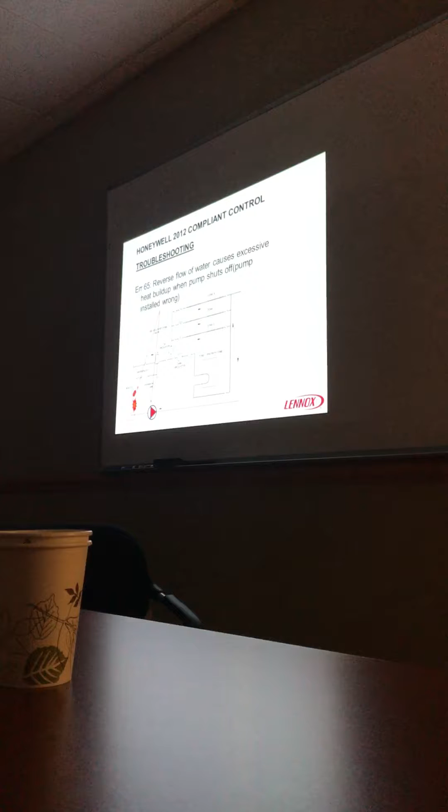Okay, so this is what I'm talking about. I don't like the circulators on the returns. I don't like that. Look at the supply, right? I like it pumping away. Pumping away is always better, if you can pump away. It's pump away. It's better. What do you mean by away?

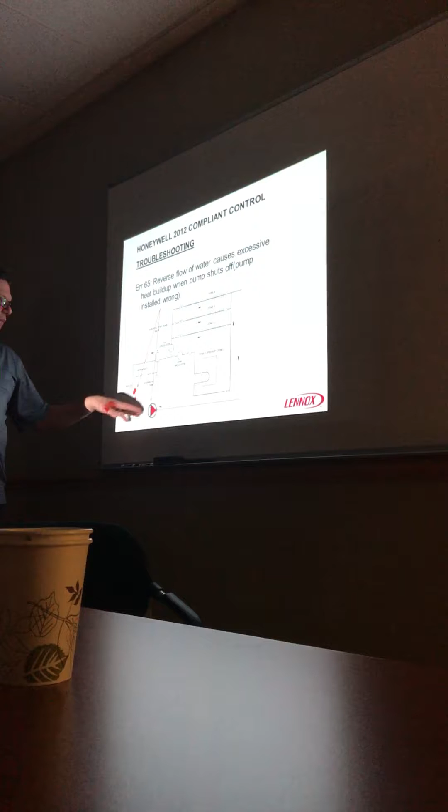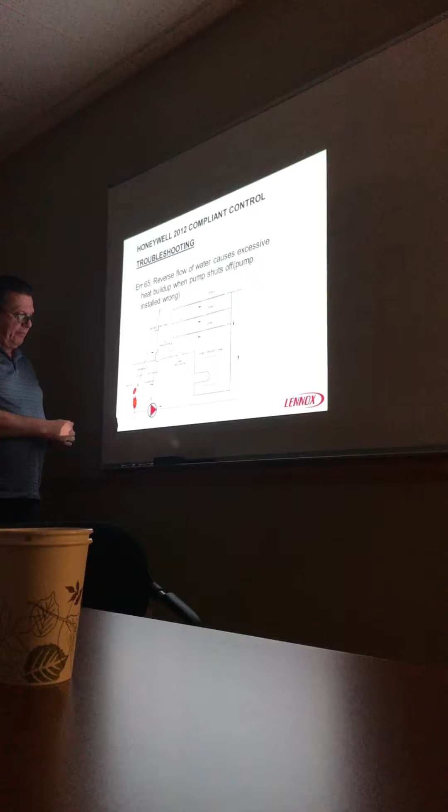Well, because this is on a return side, all return side here. Away would be on the supply. So we mount the circulator here. We're not going to drag that boiler ever into a vacuum by pumping away. Just dragging a return, we're getting all this cavitation, dribbling back and stuff. Circulators aren't going to last as long as they will on the supply with a full column of water on it. Right. So in New York, most of them are on the return.

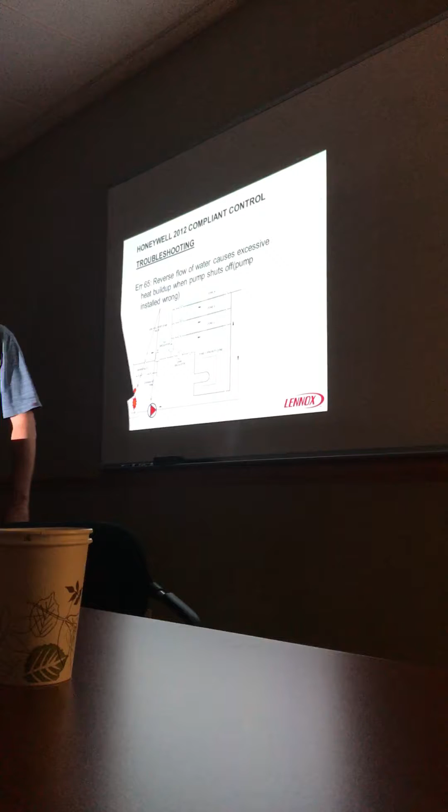Well, that's because 98% of boilers, when they ship the boiler on a pallet, they put the pump on the return side, because there was a flange there, a perfect place to mount it. We stopped doing that. That's why we mount them in a box. So they come installed, but you can move it. Absolutely. A lot of the installers just leave it there because it was already there. They assume that's the right place, the best place, and leave it. But piping this way and dragging the water would be wrong all the way around.

Aside from extending the life of the circulator pump, what's the other benefit of having it on the supply? Feeds water better. It's not going to drive down into a negative and overfeed the boiler, because it's always added pressure. As far as the piping system, anything but a primary secondary loop. On a primary loop job, if we're trying to drive the air out of that loop, pumping away is going to add pressure to the system, where pumping a return is going to be drawing it into a vacuum. Could it also cause more air to go into the system because it's on the return? Yes, it'll drag air in, where pumping away is going to pressurize.

Some customers of ours, every year, once or twice a year, they get air in the system. And they're quieter too. Airbound. Perfect customers for a pump away conversion. Textbook. Look, we could stop this game of me coming and hooking up the hose and dragging buckets of water out of here, trying to drag the air out of this thing, by converting it over to pump to the supply. Absolutely. See, you learned something.

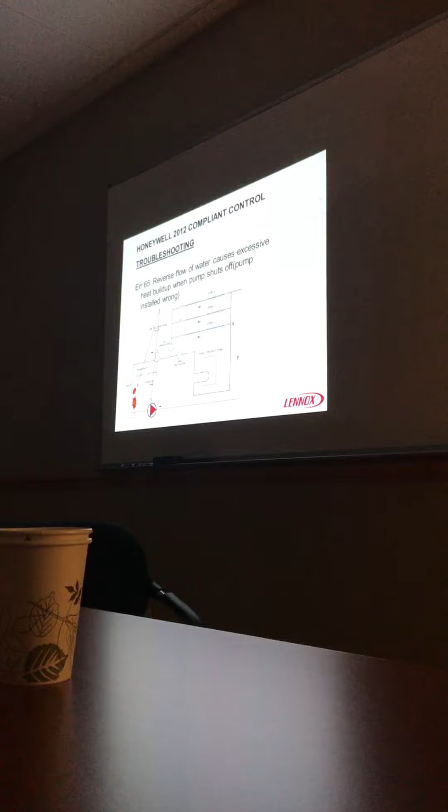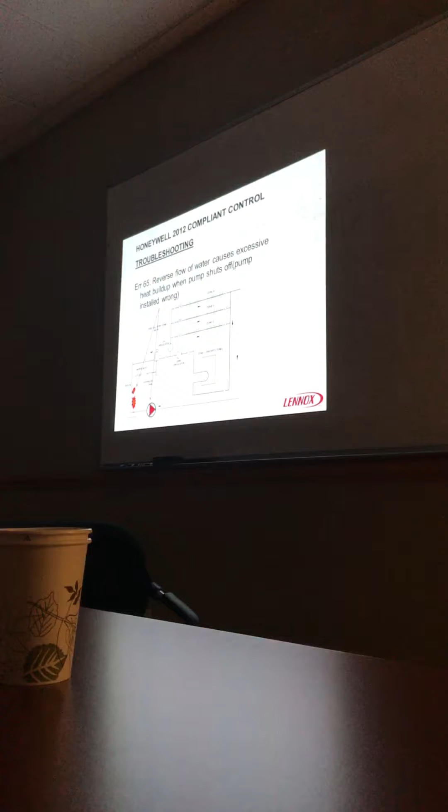One of them called like that the other day. Yeah, that's why. You haven't really enjoyed a good time till you try and drag all the air out of a monoflo tee system. It's a nightmare. And then you get a schmuck that tries to do it with the circulator running too, so you really have a bad time, because you can't get the air out of a monoflo tee with the circulator running. You gotta shut everything off.

But you're right. 98% happen on the return and they leave it on the return, because they were sent out that way on the pallet. So how do we discourage it? Leave it in the box. So now we leave it in the box. That's why it comes in a box on my boilers. Smartened up. Took years.

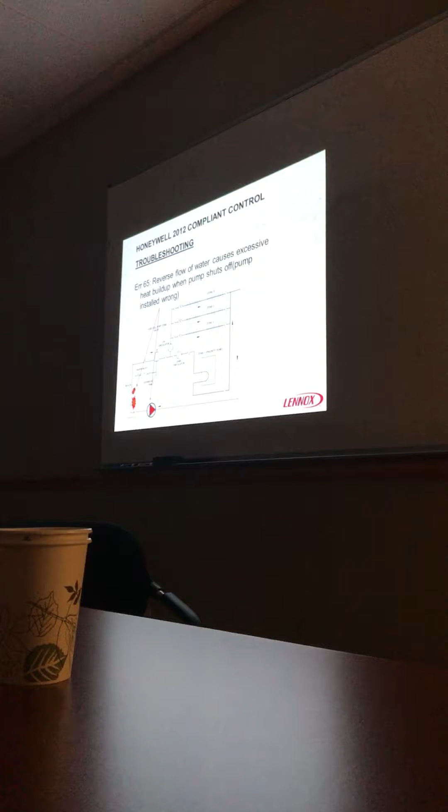Hell, we're still dealing with pilot lights, for God's sakes, in this technology. I know. So this is a very slow changing thing. Yeah, it is. But that's okay.

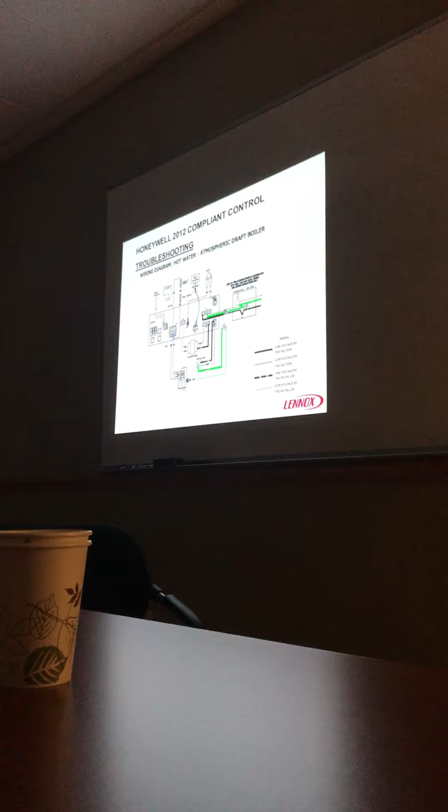Now we were talking before about the wiring diagram on this. We know the 2 yellow wires are TT, and P3 is where we want to make up the line voltage to it. And then we got our gas valve here, and the damper. So the control module is powered up by 24 volts.

Here's a real tip. If we don't see any display whatsoever on that, chances are we don't have any voltage on it. The control module is powered up with 24 volts by the transformer. If the display is blank, we suspect that there's a power supply issue. Could be a faulty transformer, somebody shorted something out, perhaps. We're gonna look at line voltage first, and then we're gonna look to establish that we got 24 volts.

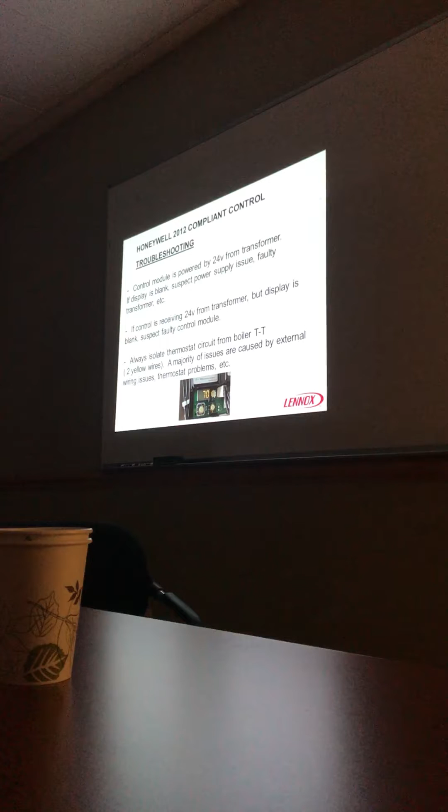If the control is receiving 24 volts in the transformer, but the display is blank, then we got a bad board. Bad board, something took it out. We always isolate the thermostat circuit from boiler TT, the 2 yellow wires. Mandatory. A majority of the issues is caused by external wiring, thermostats, and things of that nature, like zone valves and stuff like that. So these are just dry contacts. Those TTs aren't powered. They just put those 2 wires together, and they're not powered, okay?

Okay, so the control module is powered by 24 volts from the transformer. If the display is blank, we suspect a power issue. We're going to look at that, and then we can actually measure 24 volts out of the transformer on the pink and brown wires right over here. How do we measure 24 volts in this thing? We stick 2 meter leads in the pink and brown wire right there. Inside, from the wire side, like you said. Right, exactly. We don't do it from the other way, because Ed doesn't like that. It's easy from here.

Okay? He doesn't like going in on the tight hole. No, I don't like that kind of stuff. Well, there's problems with it. Then it becomes loose and it's no fun for anybody.

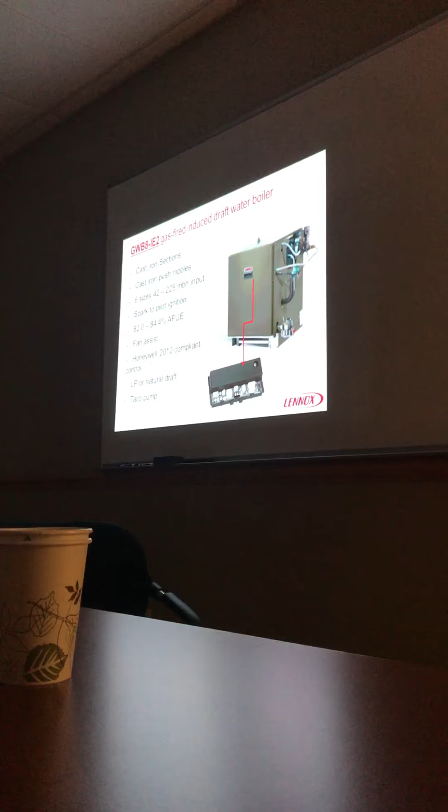Okay, so cast iron. This is the induced draft motor. Basically, the way the controls work on this boy here, it is similar. We got 6 sizes from 42 now to 225, a little smaller. Spark to pilot ignition, same. But this is fan assisted. We throw an inducer in the mix, rather than just the standard. There's a higher efficiency. A little higher efficiency.

So, venting on the fan assisted product is a little different than on a draft hood. On fan assisted, generally you want to have at least another non-fan assisted appliance sharing the same chimney. So by and large, a water heater or something else sharing the same chimney, so that we don't have condensation forming in the chimney. And if it's not, then you gotta run a liner. Like the PVC kind of material? Pipe? Not on this boiler.

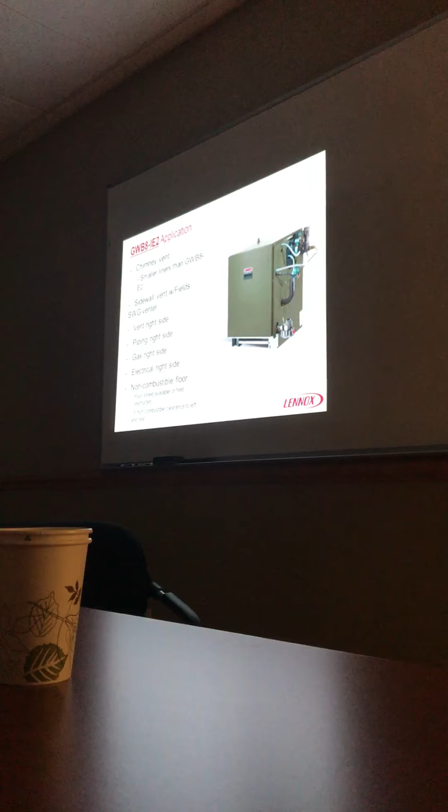What do you do, the double wall? This isn't direct vented. This still got a category 1 vent. This is still metal vent, and I like double wall pipe on all this stuff, because we don't have the screws falling out of the sheet metal, and rust stains from condensation taking place. The type B? So this is what you wanna be doing. But most don't have the double wall in the field. Well, most of them are pretty short. The chimney's right there. Stuff that's longer, the double wall's always gonna be a little bit better way to do it. That's gonna maintain the integrity of the vent products.

And how many times have you seen the screw heads get real old, rusted out, and then they're falling out? That's because condensation's taking place in there. And that condensation is acidic as hell, and it eats those screws. That's why they fall out. So to keep that away from dew point, you use a nice double wall vent pipe, and you don't have any of that in the first place.

So this one uses the dual flame rod as well. There's a little bit of a difference now on the IE boiler, because the control now's got provisions for the inducer. So there's a little bit of difference between just the standard GWB8-E2 and then the IE, which is gonna have provisions for the inducer, because it's 2 different part numbers.

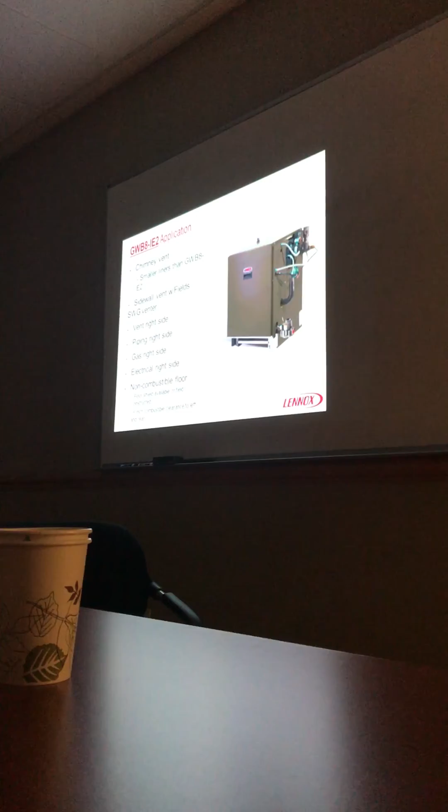Do you guys know where the inducer fan motor is? You ever seen it in the furnaces too, where you have the fan spinning? That's what they mean by that. They could be inside the boiler. This one's mounted right on the outside. Some are inside, some are outside, depends. And then the wiring difference, now we got the inducer on this thing too, see it? All of the other operating parameters, the set point we talked about, they're all the same.

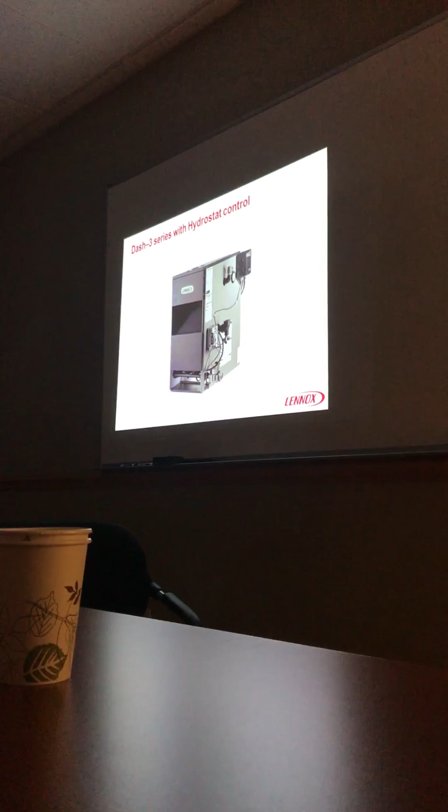Okay, this is still on the 2012, so we're gonna get to dash 3 now. This is even easier. So gone is that long, big, giant Honeywell 2012 compliant control. Now we got a couple of different components that we're dealing with. We got the sparker module for the gas valve, over here, the Honeywell one, and then we got the hydrostat control. I'll tell you all about that.